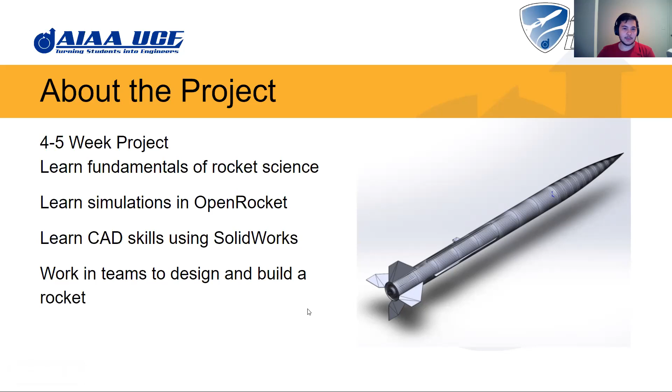The competition is set up with 3 different sections. The first is altitude - this is the simplest version. All you need to do is design your rocket and try to get to a target altitude. I know it says 1,250 feet, but this is not going to be the final target. This is an old number because we used to use thinner body tubes, but around last year we decided to go to thicker ones that are 3 inches in diameter, and so the rockets naturally got bigger, heavier, and have less altitude.

It's going to hover, I imagine, more around 900 feet, but we'll give you guys more details at a later time once we decide what actual numbers you have to go to for the altitude.

For the egg protection system, not only do you have to try and meet that target altitude, but you'll also have a capsule, a little cylinder that goes inside of your rocket. In that, you're going to have to protect an egg. So you have your big rocket, an egg inside of a capsule, and you launch this rocket. It comes back down, and you have to protect the egg inside of the rocket. Based on how well your rocket flies, how close it gets to the altitude, plus if your egg survives - maybe if it cracks you get less points, or if it's completely destroyed, that's not very good.

There's a little point system. It's more to just encourage you to try to optimize your rockets, but it's not necessarily this huge big deal.

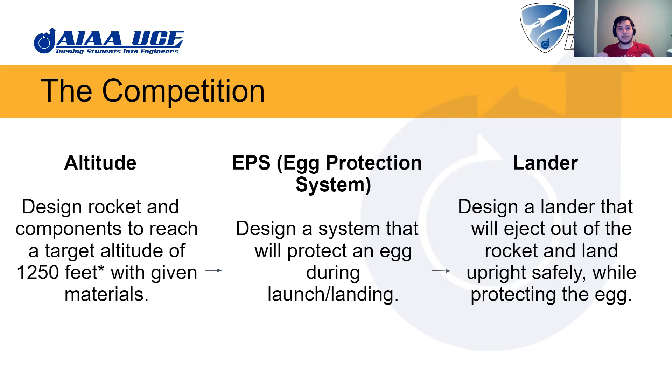And then for the lander challenge, that is what the gold division was marked previously. The way that works is you're going to have your rocket, and inside of the top of your rocket, instead of this little capsule that stays inside, you're going to have a capsule. You'll design legs, have a parachute on top, and that's going to pop out of your rocket mid-flight and land separately from the rest of your rocket. The lander challenge is definitely the most time-consuming, it's the most challenging, but it's a very rewarding project to do. Let me check the next slide here.

Does anyone have any questions about the challenges? Am I going too fast and confusing you, or do you guys kind of get the gist?

Yes, actually you can choose whatever you want to protect your egg. You'll basically get this coupler here - you get this little thing, and the rest is up to you. You can use peanut butter, packaging peanuts, straws, I don't know, anything - whatever your team thinks is best.

Okay, so I can go over the high power motors. The way the L1 certification works is you need to have done rockets before, preferably doing Rocket League first, just so you have some experience with rocketry, because we can't help you with your rocket when you're doing a certification. So if you have not done Rocket League before, we will not really allow you to do the L1 certification, because you basically need to prove that you alone are capable of building a rocket with a really big motor inside. So if you have experience, you can talk to us, and if we believe in you, we will allow you to go for the level 1 certification.

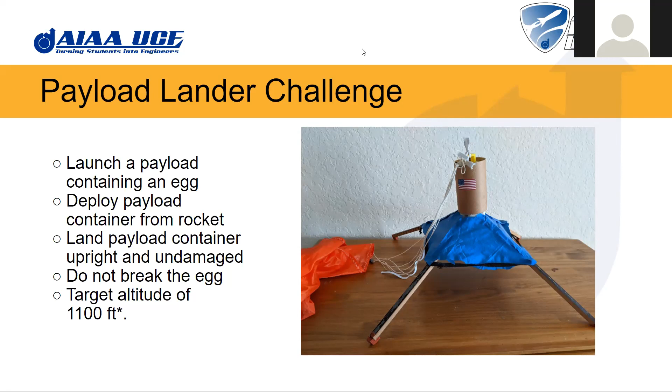It's a semester long. Once you know how to do rockets with Rocket League, you can actually get your high power motor certification basically in a year—do Rocket League now, be successful, then do your certification next semester. So yeah, that's about how long I'd say.

Any more questions? Once, twice? Okay, if anyone has questions feel free to ask and I can come back to this, but I will be moving on.

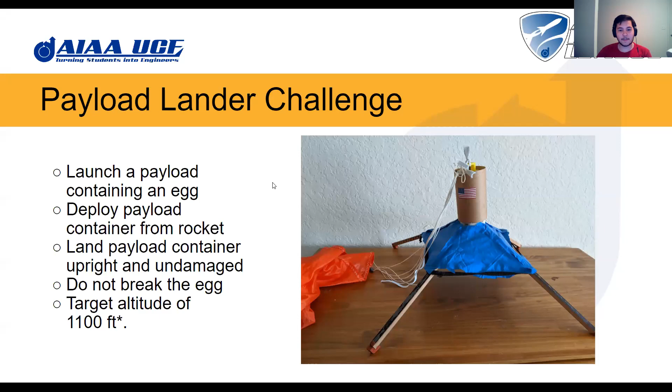This is just super basic intro stuff to get your brains ready for rockets, basically to understand the concepts. That's what college is all about, trying to understand the concepts. We're teaching you the concepts now so that once we move to actual designing and building, you're really ready to understand why you're doing what you're doing. That's what this week is all about.

Week 2 is about using OpenRocket, so make sure you have it downloaded. I'd suggest that during the meeting—whether that's today or next Tuesday—you try to follow along. The way OpenRocket and the SolidWorks basics classes work is we'll have these programs open and do the process in front of you guys. It's nice if you follow along, clicking the buttons and making the changes we do, so you're ready to go off and design your rocket yourself and use SolidWorks to get your parts ready.

So it's good to have OpenRocket ready for week 2, then week 3 is for SolidWorks, and week 4 is build time—that's when it starts. Don't freak out, you'll have much longer than a week to build your rockets. This is just when build times start. When we say build times, it really just means teams are free to collect their parts and build once they're ready to go, not that you have to build within a strict one-day window. So yeah, that's the current schedule and what we're looking at.

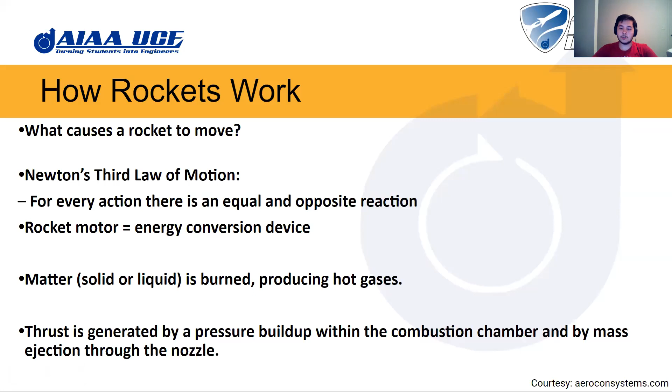Okay, let's go to the fun part, which is how rockets work. I'm sure a lot of you might have some ideas about this, so this might be a little boring, but I'm still going to go over it. What makes rockets move? Well, it's Newton's third law: for every action, there's an equal and opposite reaction. When you punch a wall, it punches you back, and the rocket motor does the same thing. You push mass down - you take matter, solid or liquid, burn it, and turn it to gas. That gas builds up pressure inside the combustion chamber, and then it's pushed down through a nozzle. As it goes down, your rocket gets a reactionary force upwards, so your rocket flies upwards. That's the basic gist of how rockets work for anyone who didn't know.

Who wants to see chat? Hold on. Hey, yeah, no, Kerbal Space Program is very good. You guys should get it if you can.

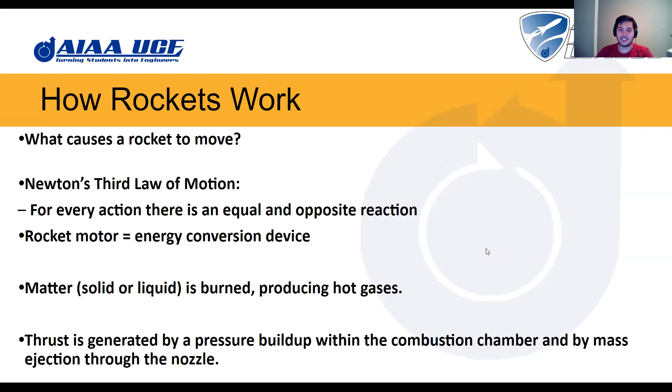So that's the motor. The motors that we use are the ammonium perchlorate solid rocket motors. Basically, the solid motors are kind of like the space shuttle boosters. You know how the shuttle has the airplane part, the giant orange fuel tank, and then the side boosters - those were solid fuel. And that's what we use.

The way it works, it's single-use, not reloadable. You have this motor, you have a little motor tube in your rocket, which we'll explain in future meetings. You take your motor, shove it in the tube, ignite it, and it goes. That's the only time it's used - once it's gone, it's done. The motor dies and you never use it again.

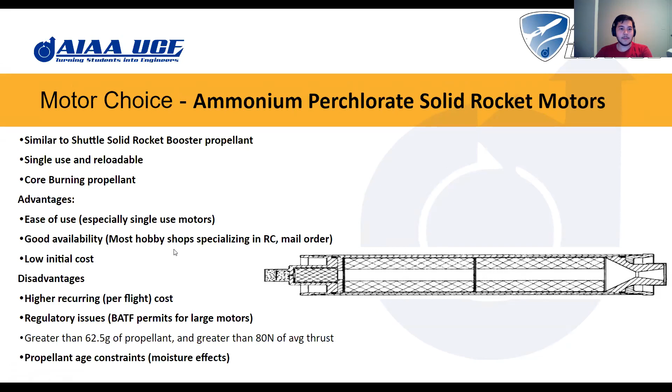The advantages: they're very easy because, as I just said, you just put it in, ignite it, and it goes. Great availability - it's very widely available, and also low initial cost, because there are multiple systems you can use, like hybrid motors, liquid, all these really crazy complicated things, but solid motors are very, very cheap for the first time you use it. The disadvantage is higher recurring, or per-flight, cost. If you have a rocket and just launch it once, which is what we do at Rocket League, solid fuel is perfect. But if you're going to launch a rocket multiple times for whatever reason, solid fuel ends up building up cost, because with some other system, all you need to do is refuel it, which you cannot do with the motors we use.

Regulations - there are a lot of regulations on stuff like solid fuel, and that's why there are also certifications because of regulations and all. And propellant age constraints - this means that when you take your motors and don't use them, and you just stick them in the damp closet, over time these motors can go bad. So you can't necessarily store them forever. It can happen that you'll have this old motor, put it in, and it's dead before launch. So you kind of wasted your money there.

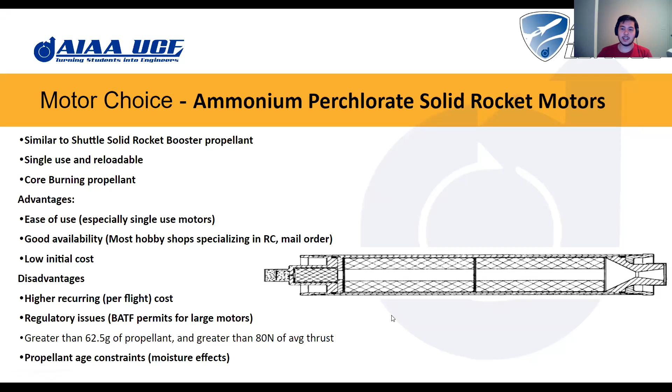But then you have this ejection charge and a delay. What happens is that after the propellant is done burning, the fire doesn't go out yet. Instead, there's a delay made up of different materials to basically cause the fire to keep burning until a specific time - like a certain number of seconds. Then you have an ejection charge, which doesn't go down - it explodes up into the rocket. The reason why is because in your rocket, you can imagine you have this rocket.

I don't have any demonstration rockets on me, unfortunately. But inside your rocket, you're going to have this cord called a shock cord. Your rocket is either going to split in half and have two attach points, one on the bottom, one on the top, or it'll split at your nose cone. I shouldn't go too far, but you'll have your nose cone that can go off, or your rocket splits in half. On the shock cord that keeps everything together, you're going to have your parachute, and then your parachute goes out and can deploy later. So that's what the ejection charge is ultimately for - it's to deploy your recovery system.

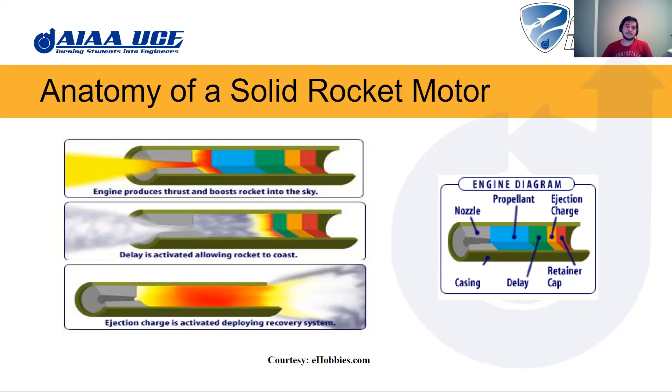Rocket motor designations. This is actually the motor that we use for you guys in Rocket League. For the L1 certifications, we use bigger motors. The way these classifications work is there are three main components: a big letter, little numbers, a dash, and then another number. This letter is like a general range of impulse. Each letter up is twice as powerful as the one before, so a B motor is twice as powerful as an A motor. The highest you can go without a certification is G, which is what you guys use.

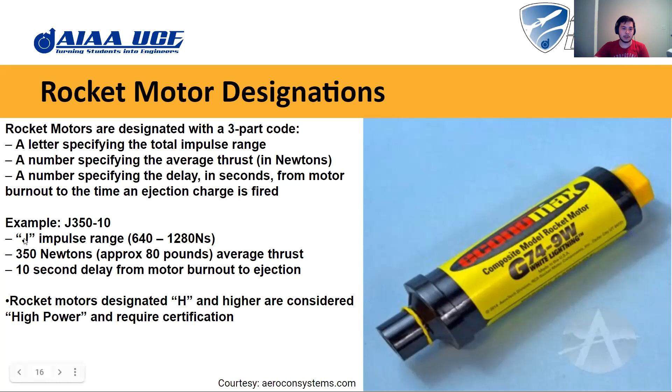The L1 certification allows you to do H and I motors, which is addressed down here. I know I'm not really following the slide, I'm getting ahead of myself, but that's what this is showing - that's the letter for impulse. This little number is just the average thrust for that particular motor, and this number here is the delay. So you have this G74-9: it's a G motor, the average thrust is 74 newtons, and there's a 9-second delay between the propellant burning out completely and the ejection charge going off. This is an example with a J motor, which is a really, really big motor. And this just shows what I said.

Now we're going to talk about rocket stability, because your rocket is going to fly up, but you want it to fly up and not do this and eventually go sideways and then down. So you need to make sure your rocket is stable. To do that, you need to know these terms - two big key words for rocket stability. Center of gravity - I think a lot of you guys know this from previous years. It's that thing where you take an object and put your fingers closer and closer to a midpoint somewhere where it balances. That's your center of gravity.

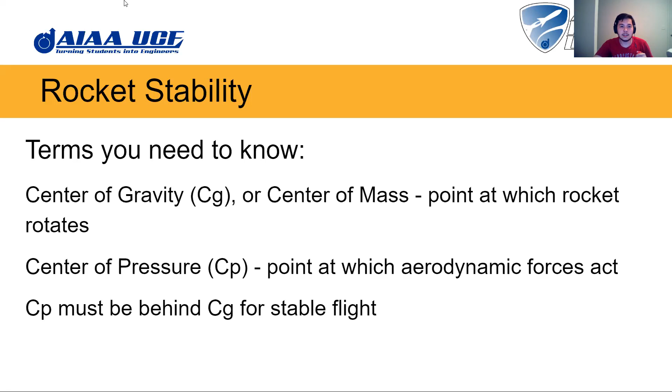The reason that's important is that whenever your rocket rotates, it's going to rotate around that center of gravity. I have a bottle - this is a rocket now, right? You have your body, and this top part is a nose cone. The center of gravity you're going to want somewhere up here, so you can imagine that when the rocket is exposed to forces, it's going to rotate around that, and you want it to do this again, to be stable. So that's why you need to know where your center of gravity is. And that CP, center of pressure, is where the aerodynamic forces act. Later slides really illustrate this.

Let me skip ahead since I'm already on the subject of rocket stability. You can see there's this diagram here, the rocket is sideways like this. So imagine your rocket is going upwards, and then something happens - either the manufacturing is slightly off so it naturally tilts one way, or a gust of wind pushes the top and it goes like this. Your rocket is traveling upwards, but it's sideways, so you have your wind dragging down like this, okay? So there are all these aerodynamic forces along the side of your rocket.

You can average all that out to the center of pressure, which is going to be right here - your center of pressure is going to be kind of down here. So imagine your center of gravity up here by the top, and you want your center of pressure down here by the bottom, okay? And the reason the center of pressure is on the bottom is because you have your fins, right?

You're going to have 4 or 3 fins along the sides, which is going to create a lot of drag. So what happens is that when your rocket tilts to the side, you're going to have forces going down from the side, and you can have 2 components.

I don't know how many of you are familiar with resolving forces into components, but imagine if you have an x-axis going along the top of the rocket and then y perpendicular to that. If you have this angled force here, part of that is going to go down along the rocket, which is going to be like a drag force. And then another part is going to be to the side, perpendicular.

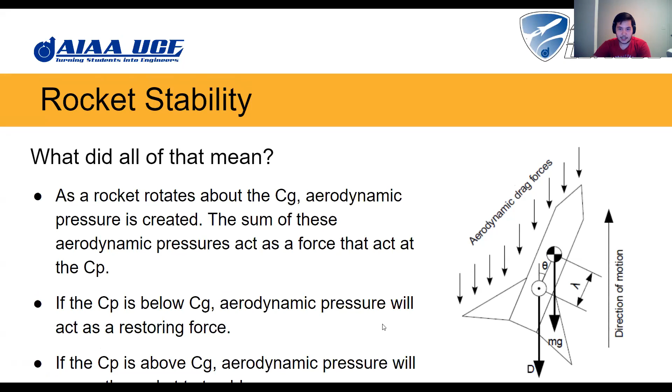Yeah, so that's basically what this slide is talking about. This slide really helps demonstrate too why it is so important for your center of gravity to be on top. Because in an unstable rocket, if your center of gravity is here, but your center of pressure is somehow here...

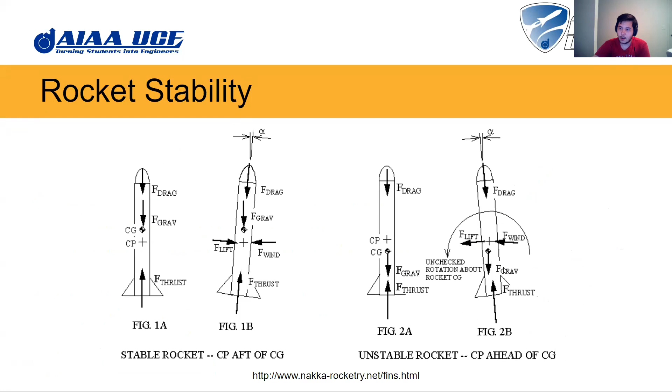Oh wait, hold on, let me check the chat.

Okay, cool. When your rocket goes to the side, if your center of gravity is here, but your center of pressure is here, when the force goes, it's not going to restore. It's going to go in the same direction as the rocket as it's going, and so it's just going to flip like this. And that's bad. If your rocket does this mid-flight, you did not build it right or design it correctly.

So that's why you want your center of pressure to be below your center of gravity. I said it backwards, center of gravity above pressure. Keep this in mind at all times.

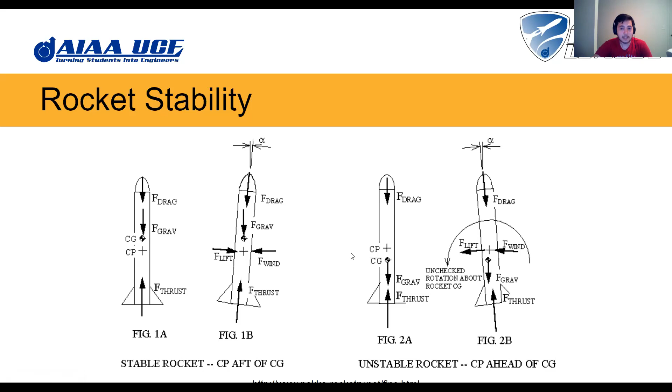Okay, so if everything makes sense to everybody, I'll move on to fin design. Fin design is really important because, well, all rockets have fins for a reason. And so there's a few terms that you're going to need to know when it comes to fin design.

The root chord is basically how big the fin is from tip to tip. So imagine if you have a fin like this, your root chord is going to be where my middle finger and thumb are, so it's just that big length down there. The tip chord is just the top, so basically where the palm of my hand is, if the fin is like this. You have your fin height, which is how high above the body of the rocket it goes, so the length of my thumb plus whatever else to my palm.

On the bottom of your rocket, you're going to have a lot of important components, that being where your motor is and where your fins go. So the bottom has your body tube, and inside of that you'll have a motor tube, which is where your motor will go. And you'll have centering rings to hold all that together.

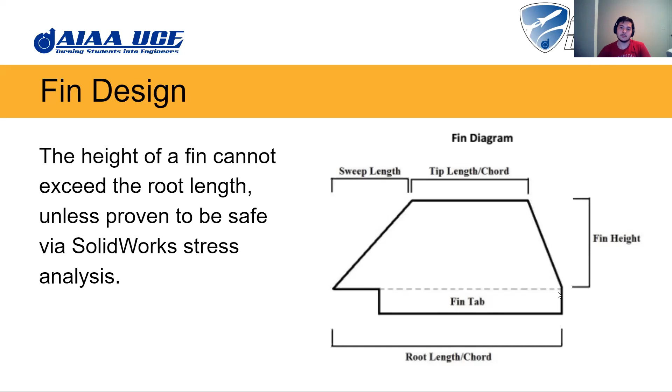Yeah, I don't know why these slides are so misordered. I'll go back to this later.

Fin design. Fin shape is actually not so crazy important, so long as your rocket ends up stable, you'll be okay. Some of the nice designs for rocket fins include trapezoidal. I've used this before, it's really nice.

You can have a tapered sweep, but you shouldn't sweep it too much because this can leave your fins prone to breaking. Not that you shouldn't do it at all, just don't make it so crazy swept that we start getting concerned. There's also a clipped delta, with a straight edge in back and a taper in front. You shouldn't have straight square fins. We don't usually just do straight squares. We like to have that taper so it's kind of like an airfoil shape-ish, to reduce drag.

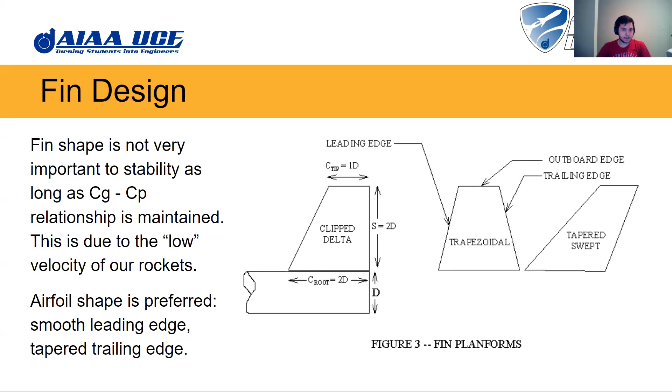What's the next one? Nah, we'll talk about that later. Yeah, sorry for misordering.

Just to go back to rocket stability, after all we talked about with CP and CG, in OpenRocket you'll see a number called stability, based on caliber, which is one body tube diameter. We'll show you where it is. It should be from 2.0 to 2.5. If that number is there for stability, your rocket is good. You have a nice, stable rocket. When it flies, it will be able to restore itself successfully.

If this is too low, like you're at 1.95 or whatever, your rocket might go topsy-turvy. We will not like that, and we'll tell you to change your rocket. If it's above 2.5, it's not that it isn't stable, it's almost like it's inefficient. So let's say you're above 2.5, like at 2.7, your fins might be too big. They're producing unnecessary drag, they're too heavy, and you don't need that.

To make your rocket stable, you can make the fins smaller, have it fly higher, and still be very stable. Or let's say you add mass somewhere you don't need, you can just take that out. There are 3 ways to increase the CP-CG margin, which is one thing I really want to address. If your CP and CG are too close together, or your CG is somehow not very far from where you want it, length of the body tube is tough because we give you a set length for your body tube. You can make it shorter, but let's see the chat.

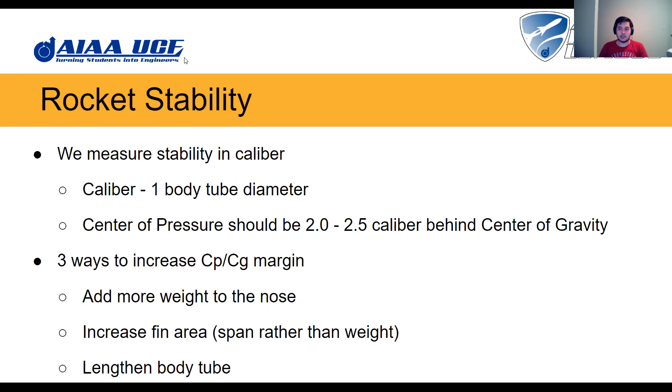So don't worry about having to do this crazy stuff to find CP. Once we explain OpenRocket, it will all make sense. Just take this as a lot of conceptual stuff.

But the CP-CG margin thing is good to know. Lengthen body tube, don't worry about that, you're not going to do that. The first two parts, very, very good. Add more weight to the nose.

If you have your CG very low, like this, your CG's here, your CP's here, and you need it to change, what do you do? Well, you can bring the CG up by adding weight to the nose. Imagine you have this plastic nose cone we're going to give you. What I did before for my level 1 certification was take copper BBs, and this could be any mass component, like the copper BBs I had lying around.

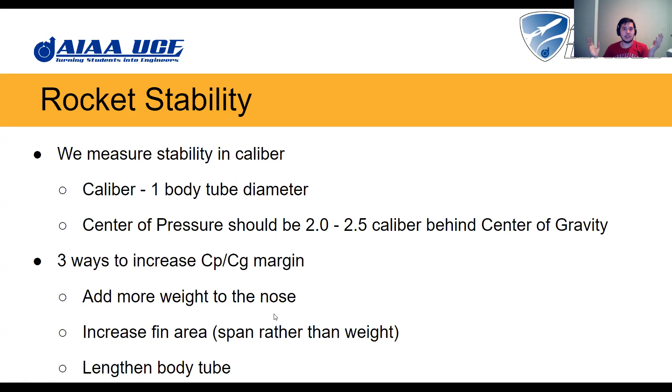Another way to increase the CP-CG margin is to increase fin area. Instead of having smaller fins, you make them bigger. Naturally, that increases the forces caused by the fins, so instead of the forces on top of the rocket being so dominant, you add more force to the bottom, and your CP will naturally go down. The only thing is, if you increase the weight of your fins, you'll also bring your center of gravity down as well. So it might not be the most efficient way to do it, but I'm sure you guys can make it work. That's how you try to fix your stability if, after all your designs, it still isn't working.

Okay, so we did fin design. Now let's do deployment, this is all about recovery. Let me check my time, 7:06, wow we got a lot of time.

Deployment: the way it works, I've been telling you about these parachutes, you have your ejection charge, your rocket splits up either at the middle or the nose cone, and there's your parachute. There are two ways you can go about deploying your parachute. Single deployment means that the moment your ejection charge goes off, your parachute just unfurls and does its parachute thing.

We do dual deployment. The way that works is we have this little device called a chute release. You have your parachute, you fold it up nicely, you put it against this electrical component, and there's a rubber band with a pin on the end, and you clip it. What the chute release does is your rocket goes up, your rocket splits apart, but the chute release holds the parachute closed.

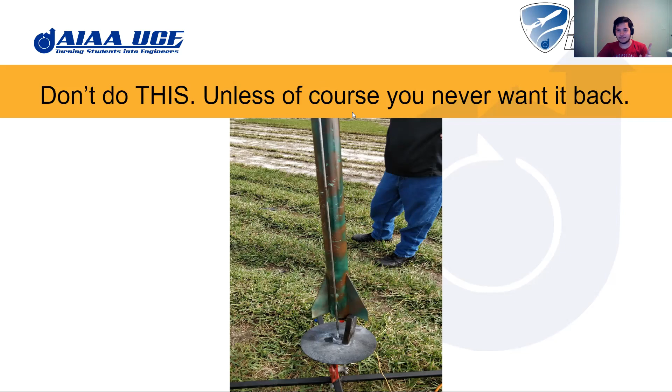Yeah, I think that's a little more simple compared to the stuff before. Due dates—this is all still pending. I'm sure a lot of you have already got your interest form in.

OpenRocket will also tell you what that is. OpenRocket's amazing—it will just tell you everything. It will give you an estimated apogee; apogee is just the highest point in your flight. But also on launch day, we'll attach an altimeter into your rocket, and that will be able to read what altitude your rocket actually went. So you'll have an estimated height from OpenRocket, and we'll have your actual height from an altimeter. Going back to the objectives, where it's like you have a target altitude—that's how we'll know how high you went. You have this altimeter in it.